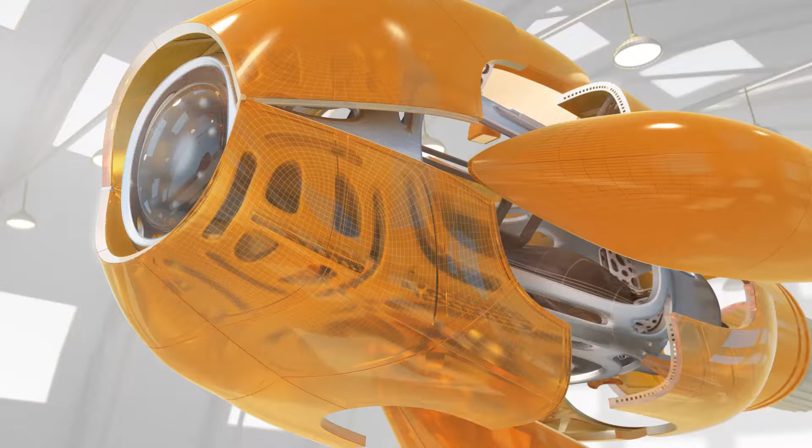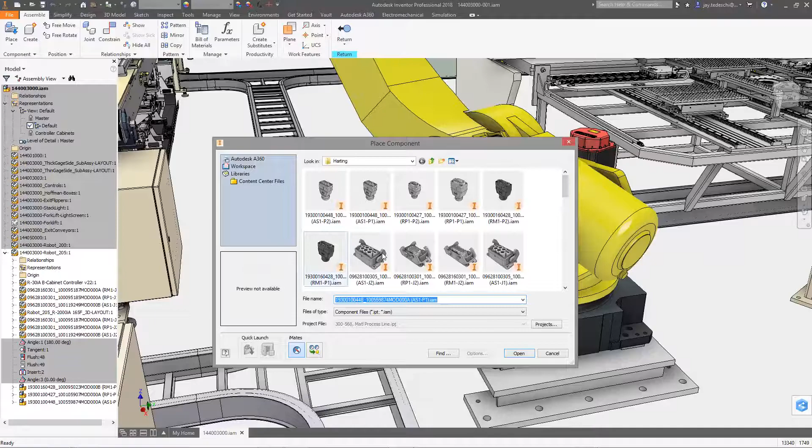Designing electromechanical systems presents a significant collaboration challenge. Ideally, you should be able to design your electrical and mechanical systems simultaneously, sharing up-to-date information between your electrical schematics and your 3D models. Autodesk Product Design and Manufacturing Collection helps bridge the gap between electrical and mechanical designers by connecting your individual tools in real time.

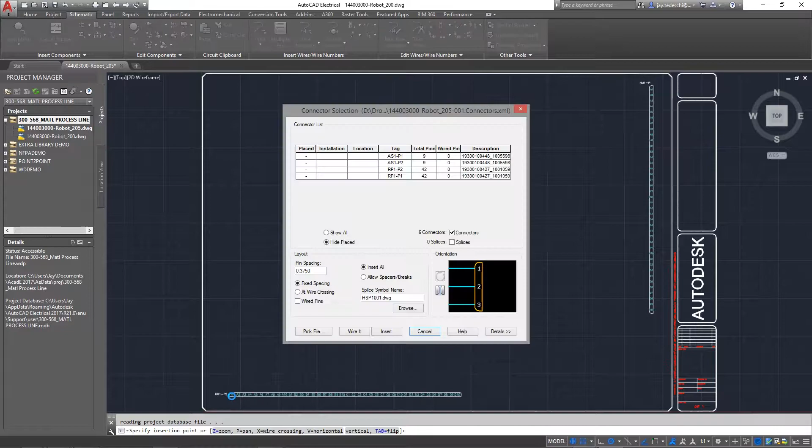Let's take a look. The foundation of this workflow is the ability to share information back and forth using a simple electromechanical link. Once established, you can start sharing live data between Inventor and AutoCAD Electrical. Any changes you make in one system are quickly synced in the other, so everyone is always working from the latest version of the design.

The location view is a shared module between Inventor and AutoCAD Electrical that shows all components and wires in your design in a single location. Components are listed by installation and location, making it easy to keep both applications in sync.

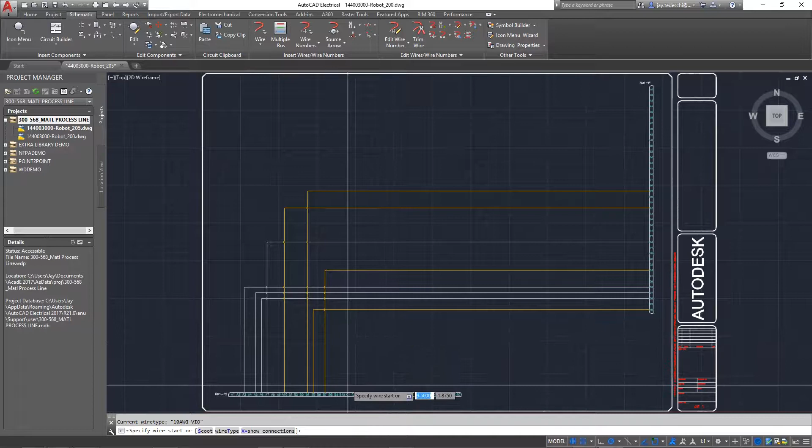And linking CAD files from your 3D models to their 2D schematic counterparts can be done simply, all within the browser. There is also an electrical catalog browser for Inventor, so you can insert 3D parts by selecting a catalog value that is linked to the AutoCAD Electrical database.

You can download 3D electrical component models from vendors or create your own and associate them to a specific catalog value. The part will then be associated for future use, so you can build up your electrical library for future design work using the same components.

Once all your components are placed, you can automatically create all the cable and wire connections between them. And whether the wire connections are created in AutoCAD Electrical or defined inside Inventor, they will always be in sync with each other, updating anytime changes are made in either software.

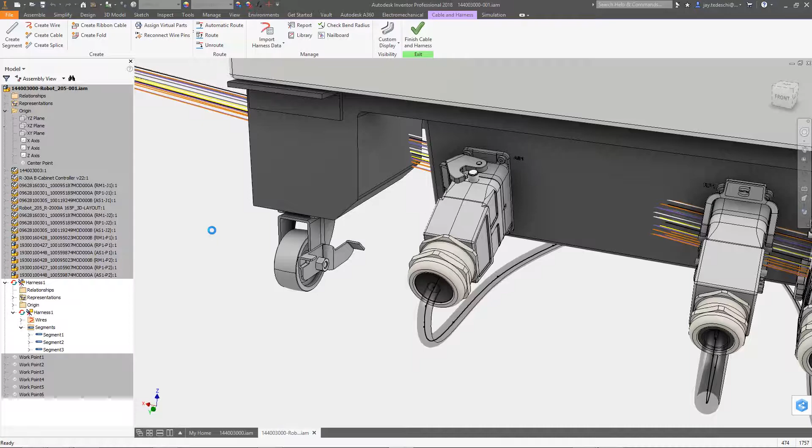When you need to design complex electromechanical systems, you need tools that can speak the same language. With the Product Design and Manufacturing Collection, your mechanical and electrical engineering teams are always working together from the same point in the development process, helping move the design forward.